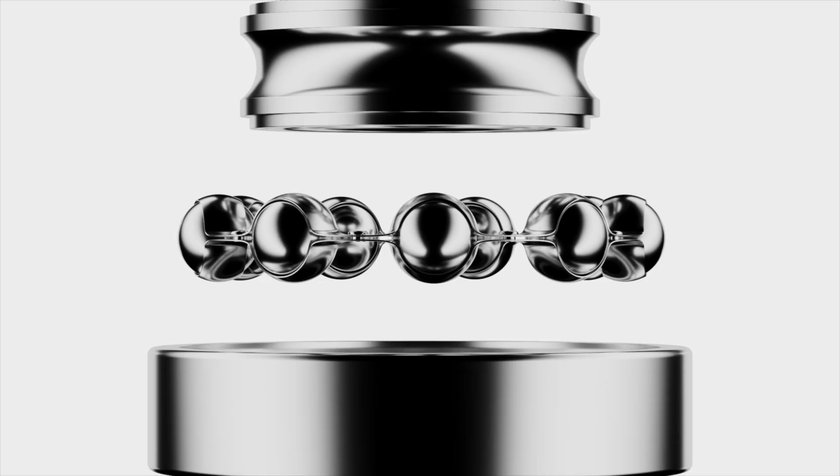Throughout my time at SKF, I've always been inspired by one question: how do we turn great engineering into real benefits? I'm talking about developments that truly help our customers and have a positive impact on the world. For example, innovations that increase reliability and efficiency, or help reduce carbon footprint, or transform your maintenance strategies, minimizing unexpected failures that deeply affect customers' operations.

Last year, we focused on innovation with a purpose. Your feedback was clear: you wanted deeper discussions, clearer use cases, and more real value. And this year, we're planning to do all of that and go even further.

You will go from insight to impact. That means taking what we know from machines, computer simulations, and our engineers' experience, and turning it into value. Think cleaner energy, more uptime, less waste, and much better decisions. In short, results that matter for your business.

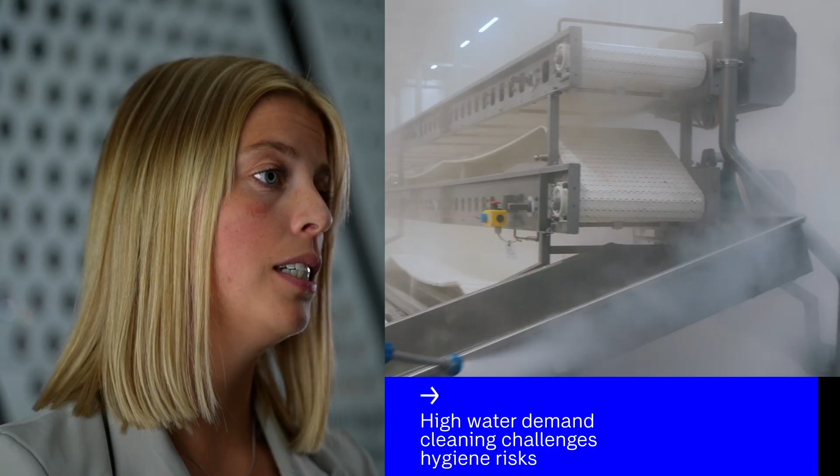Water consumption, cleaning inefficiencies, and food safety risks are often tied to equipment design. And as efficiency targets rise and regulations around hygiene and sustainability become stricter, producers must find ways to clean more effectively, to protect food safety, and to cut down on waste, all without adding complexity.

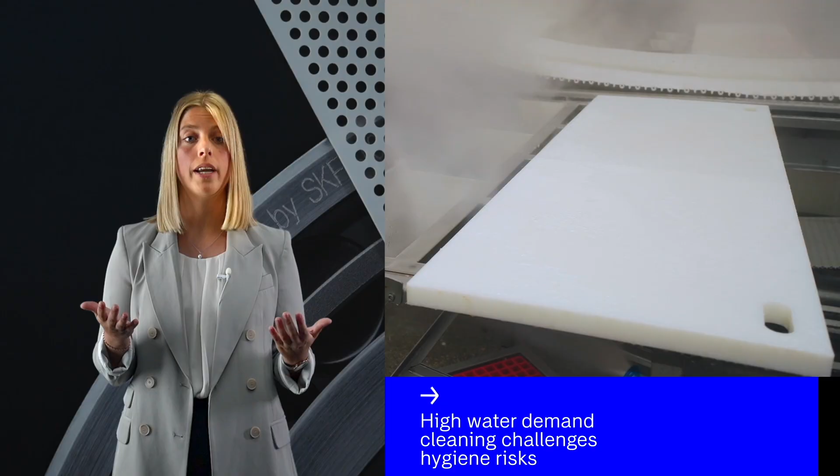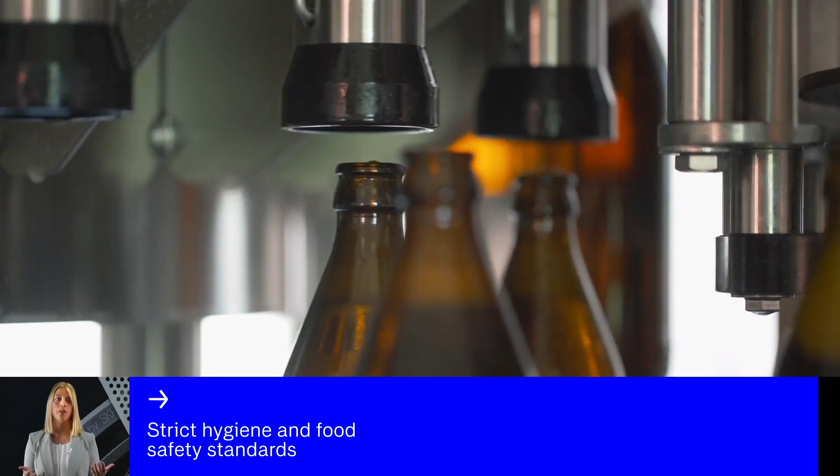Let's take breweries as an example. They rely on systems like clean-in-place, bottle washers, pasteurizers, filling and capping machines, conveyors, and other automated equipment to keep their production running. These systems also need to meet strict hygiene standards and comply with food safety regulations. And that all comes with a cost in water, energy, labor, and time.

Cleaning alone can consume thousands of liters of hot water every day. To put that into perspective, for every 0.5 liter bottle of beer produced, up to 0.75 liters of water may be needed just to clean the line.

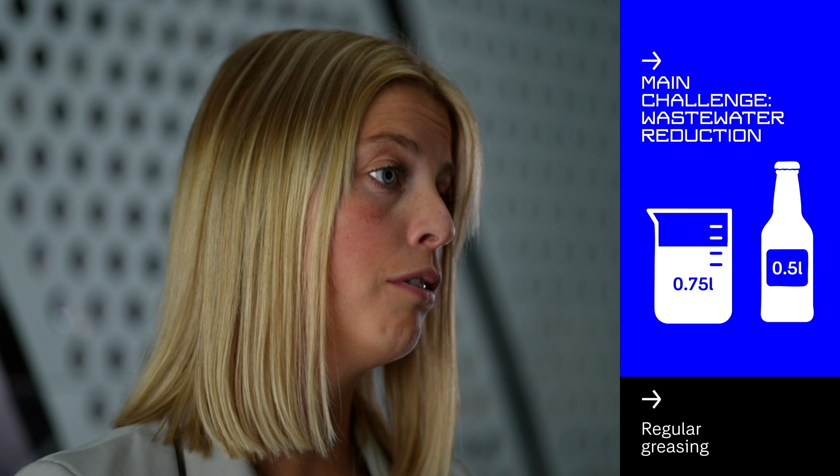Bearing units on the line typically require regular greasing, but during maintenance, production, and cleaning, that grease can leak out. That means more water to remove the residue, more maintenance to reapply the grease, and a higher risk of contamination if any of it reaches the equipment, the product, or the final packaging.

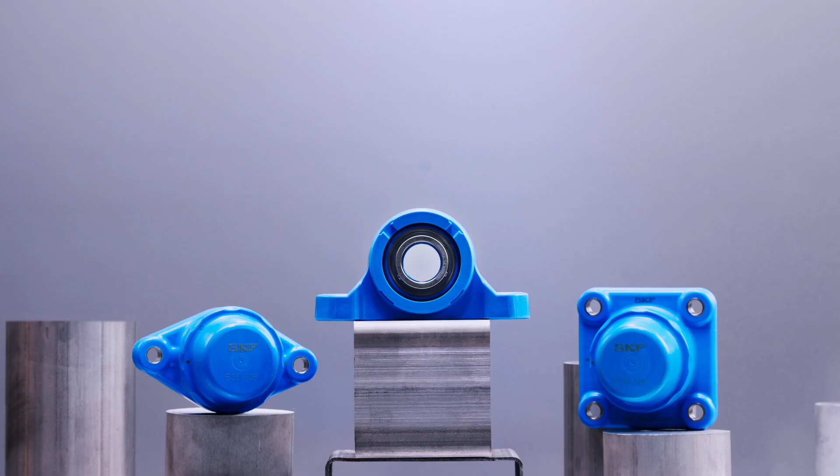It's that kind of environment that we had in mind when developing the SKF food line ball bearing units. They are designed for zones where contamination risk is high, cleaning is intensive and frequent, and where downtime is measured in lost production and financial consequences.

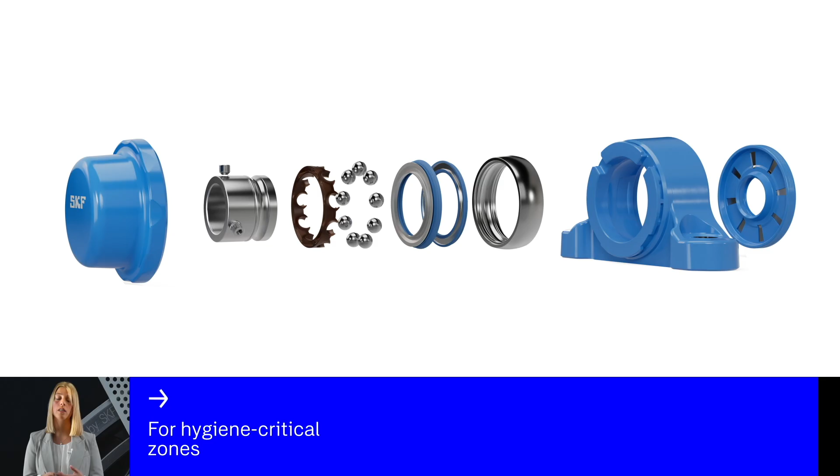SKF food line ball bearing units are used to enable reliable rotation in the food and beverage production equipment. We've mentioned breweries, but these units are used in the production of all sorts of alcoholic and non-alcoholic beverages, as well as dairy products, meat and poultry, fruits, vegetables, and many other types of food.

The hygienic geometry of the housing helps avoid dirt traps where bacteria might grow. The smooth surface enables effective drainage and easy cleaning. Seals are positioned to block contamination from critical areas and keep the bearing grease inside. End caps feature a patented locking system that keeps them securely in place during high-pressure washdowns.

Because both the seals and the housings are blue, any loose parts can be quickly spotted and removed before they become a safety risk. Just as important, the SKF food line range complies with key global standards, including FDA and EC regulations. The bearing is fully sealed inside the unit and greased for life with a food-safe lubricant. Sealed bearings require no relubrication or maintenance, and therefore reduce the consumption of grease and grease absorbents, as well as the risk of grease reaching the final product.

It's a cleaner way to operate with fewer maintenance tasks and less environmental impact.

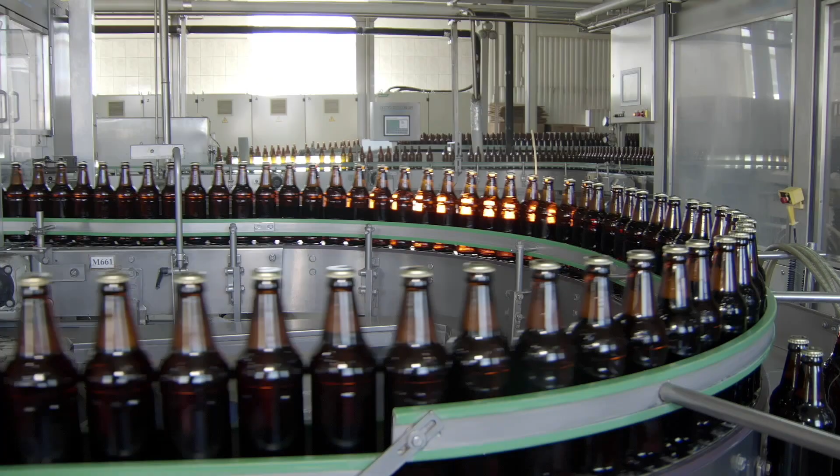For breweries that have switched to SKF food line ball bearing units, the benefits are clear. Cleaning has become more efficient, with up to 33% less hot water needed to clean the units compared to setups that require cleaning excess grease and use non-hygienic designs.

And because the bearings are fully sealed and greased for life, there's also less maintenance involved. Fewer tasks, less downtime, and more focus on production. It's a small upgrade with a measurable impact on sustainability, cleaning performance, and day-to-day operations.

So we've talked about breweries, but what about your own facilities? Ever wondered how much water, energy, or CO2 you could save by just changing the bearing units you use every day? To help answer that, SKF developed an environmental cost calculator.

It's a practical, data-driven tool that shows the real impact of switching to SKF food line ball bearing units. It uses your own plant conditions, cleaning frequency, water temperature, maintenance routines, to estimate your savings in water, energy, waste, and CO2 emissions. It's a simple way to turn small component changes into real, measurable sustainability gains.

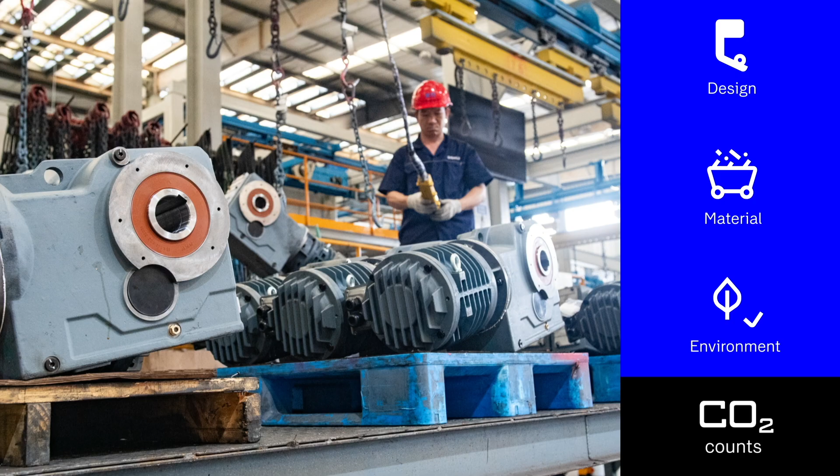When developing a high-performance seal, every decision counts: the design, the material, the environment it's exposed to. And today, every fraction of CO2 counts as well. Seals can generate up to 60% of the frictional torque in a bearing system and strongly contribute to the carbon footprint our customers must report and reduce to reach their net zero targets. After all, less friction means more progress. At the same time, seals are critical for system reliability, with around 20% of reported premature bearing failures caused by sealing issues. That's why sealing performance can't be an afterthought. It must be considered right from the start.

Let's see how that plays out in a tough, real-world example.

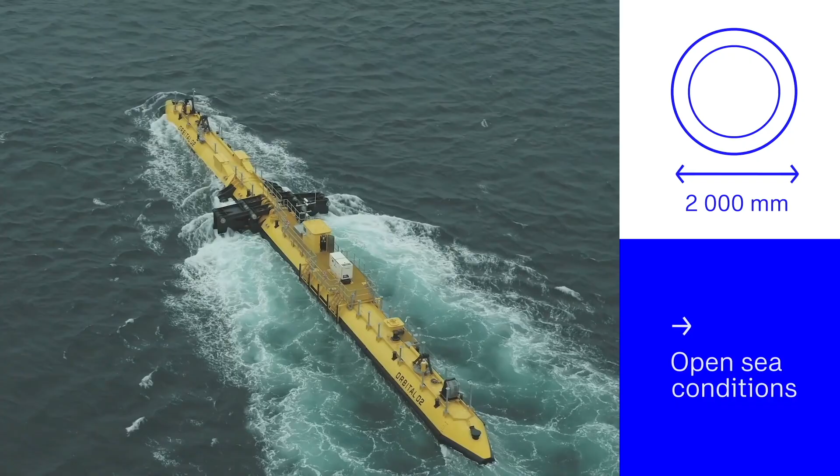Think of an ocean turbine with seals 2 meters wide, operating several miles offshore and up to 30 meters below the surface. Constant pressure, corrosive seawater, thermal gradients, all challenging the seal at once. In conditions like this, standard testing and trial and error are no options. We must consider the impact of many different parameters early in the design phase. So how do you develop, assess, and validate a sealing solution in a case like this?

Imagine being able to test the effect of each parameter and predict how years of operation would influence the seal's service life, all in one instance. That's what our digital twin technology makes possible. It virtually mirrors the real seal and shows how it operates inside the actual machine.

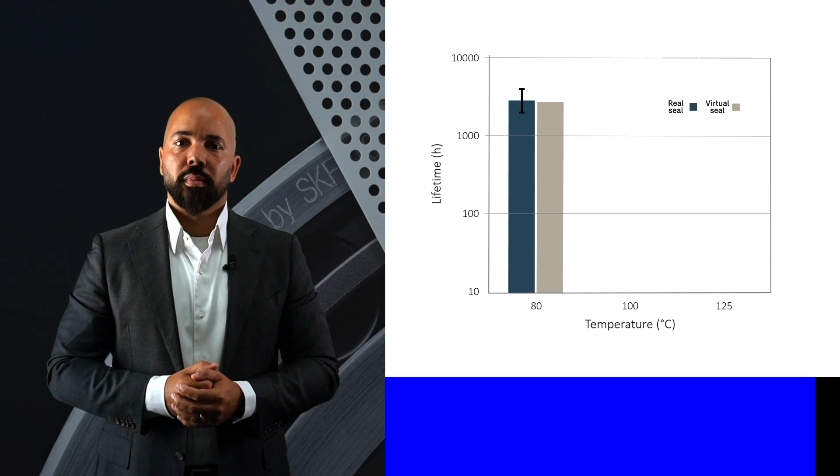Engineers can tweak the design virtually and instantly evaluate how the seal performs under dynamic conditions across combined parameters, from leakage risk to CO2 footprint and expected service life. And the virtual results reliably match the performance in the real application. It's like stepping inside the seal for virtual reality, watching it work and knowing exactly what needs to change to meet customer requirements, all before a single gram of sealing material is even produced.

In standard practice, testing just one parameter, like how a seal works with a certain lubricant at a given speed, takes at least 3 samples to get reliable results. Add up the cost, and you're quickly talking tens of thousands of euros per test. With 3 lubricants, that's 9 seals, all of which need to be discarded, adding to the overall environmental impact. And that's not even counting the energy to run, heat, or cool the testing machine, or the effort to produce and ship the samples.

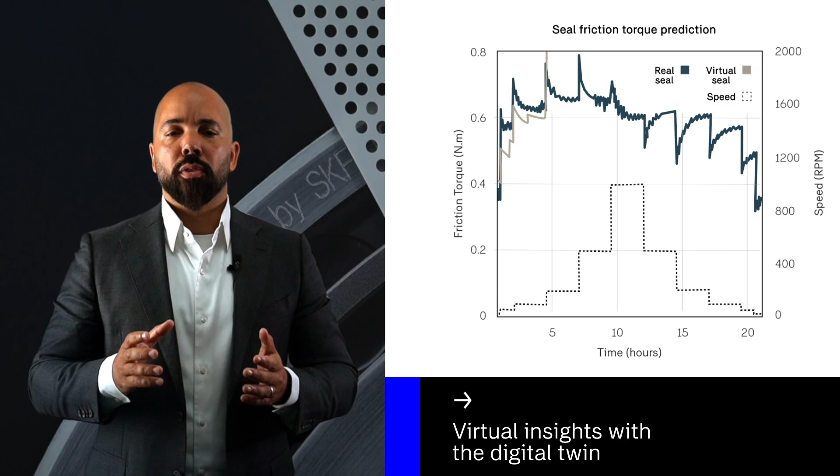That's material, energy, and CO2 spent just to find out what doesn't work. Not to mention time and effort. With the digital twin, we can explore the same variations virtually, reducing the need for physical testing without replacing it, acting faster and smarter to help applications run longer, cleaner, and safer.

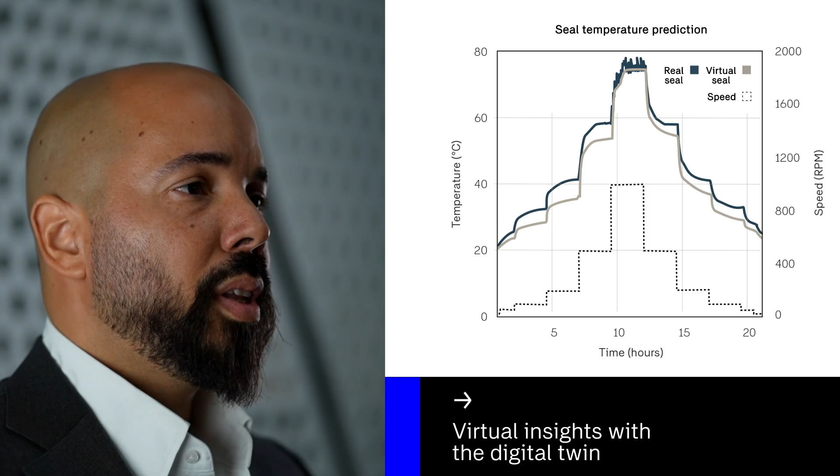But it's not just about the development process. Once the real seal is in operation, we start collecting live data, from temperature and load shift, to shaft speed, leakage risk, and more, all monitored over time with smart sensing. That feedback from field data flows into the digital twin. It helps us spot early warning signs, adjust real performance expectations, and fine-tune maintenance before problems occur.

Think back to our ocean turbine example. Unplanned failures or unnecessary maintenance could mean serious cost of downtime or repair. And if a customer reports an issue, we can recreate the conditions virtually, study the cause, update the design, and often fix it before the problem happens again.

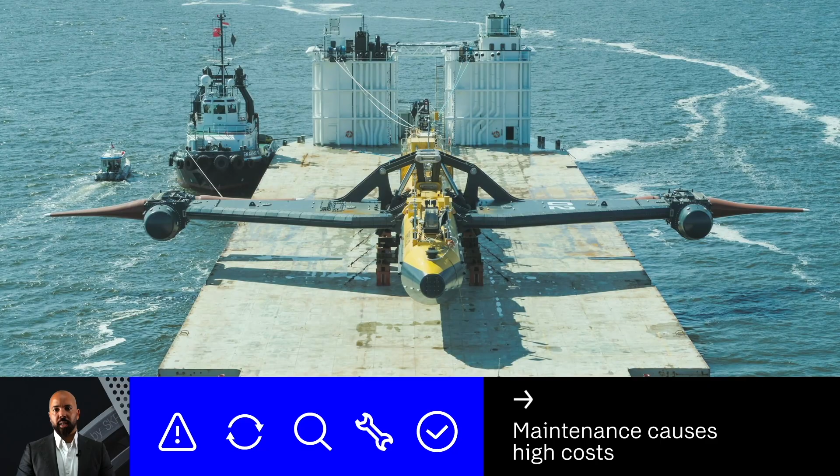It's a continuous loop of learning and improvement, from virtual seal to real seal, through development and production stages, and back again, powered by advanced simulation, smart sensing, and data science. That's what makes our sealing solution truly intelligent.

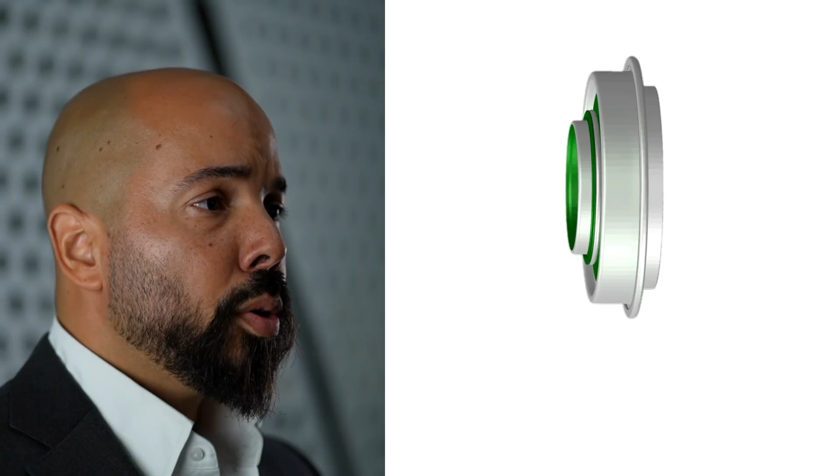That intelligence, the insights from the digital twin, takes us beyond simply delivering a product. It enables us to support our customers with dedicated services, because the digital twin technology gives us an unmatched understanding of how a seal behaves, backed up by over 20 years of research embedded in the platform. And while not every customer has sealing experts on site, the digital twin will help us make that expertise available wherever it's needed. Now let's think beyond the ocean turbine example.

Seals are literally everywhere, in industrial robots, tractor wheels, and wind turbines. By developing digital twin technology, we can make every one of those seals smarter, more efficient, and more sustainable, not by trial and error, but by understanding exactly what they are doing and what they will need to handle next.

And that's the strength of SKF. We never look at a seal in isolation. We understand how it works together with the bearing it protects and the entire system around it. Because when you can visualize the system in this way, you can optimize the performance of every component inside it. That's how we are reimagining rotation for a better tomorrow.

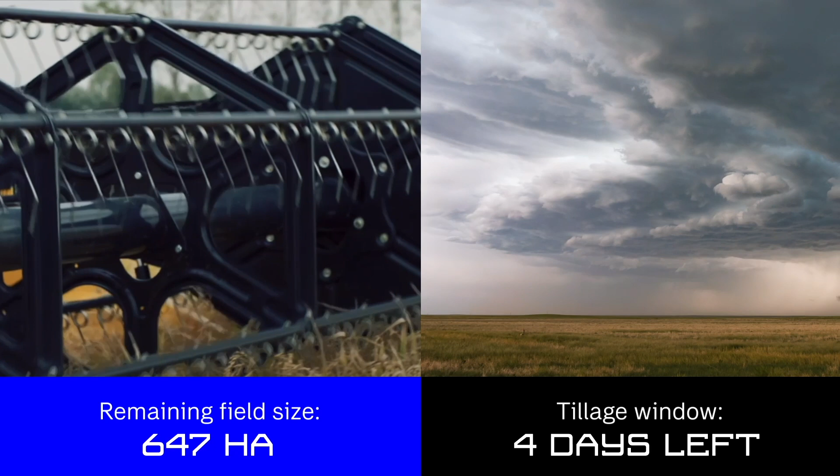Imagine you're a farmer and tillage season has just begun. You have four days of good weather, about 647 hectares of land, and a narrow time frame. Every moment matters, every machine matters, and every component on that machine has to do its job reliably. Let's look at the disc harrow, for example. It's used to manage residue, loosen the soil, and perform shallow tillage. As it's pulled across the field, the rotating discs cut into the soil.

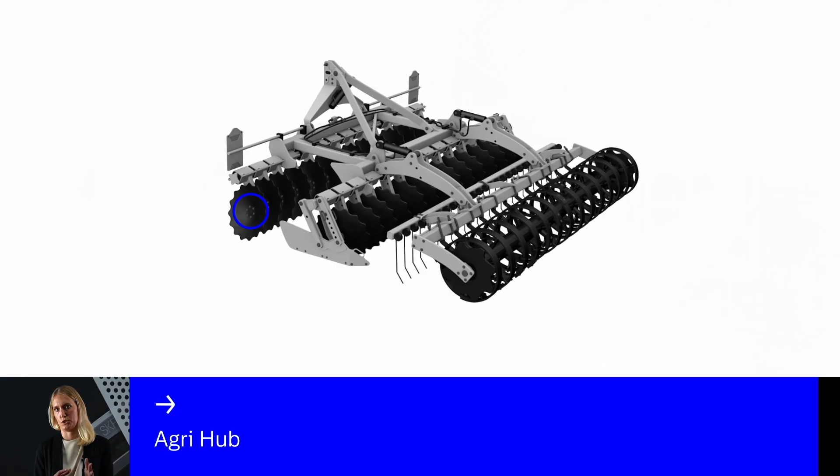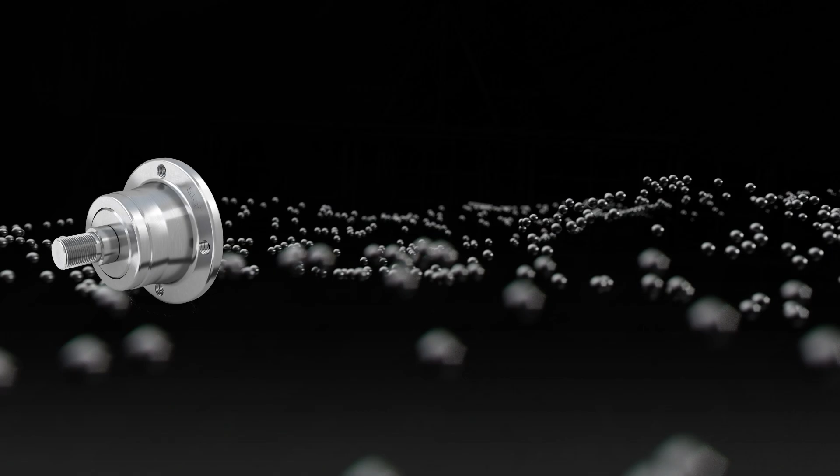At the center of each disc is a compact, sealed unit, a bearing assembly known as a hub. It's absolutely critical for reliable rotation. At SKF, we have spent decades developing and continuously improving these units, catering for various requirements of both equipment manufacturers and farmers. Today, these agri-hubs are mounted on machines around the world, helping to produce all kinds of crops. But some conditions push beyond the limits, especially when abrasive soils, high-speed equipment, and hundreds or even thousands of hectares come together. This is exactly what farmers face today in many parts of the world. The larger the fields they work, the longer the machines must run reliably. And the tougher the soil, the greater the stress placed on components like bearings and seals.

These challenges are real, and they have shaped the next step in our AgriHub evolution. We focused on improving service life and durability so farmers can become more productive. Our most advanced integrated solution yet has been engineered specifically for independent tillage discs to thrive under the harshest operation conditions. This is the AgriHub T400.

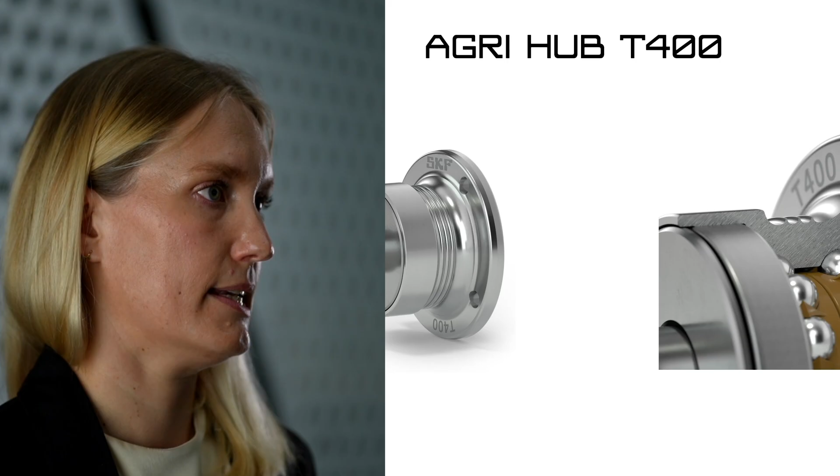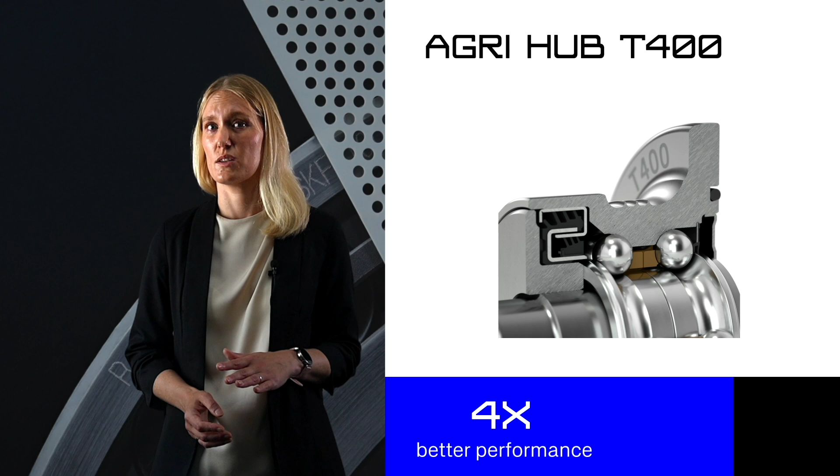At its core, it's our patented super mud block seal, designed and manufactured entirely in-house by SKF. In laboratory mud slurry tests, it delivered 4 times the sealing performance of conventional solutions. 4 times, this means no unexpected downtime, even on large farms. The seal keeps performance high in the toughest conditions.

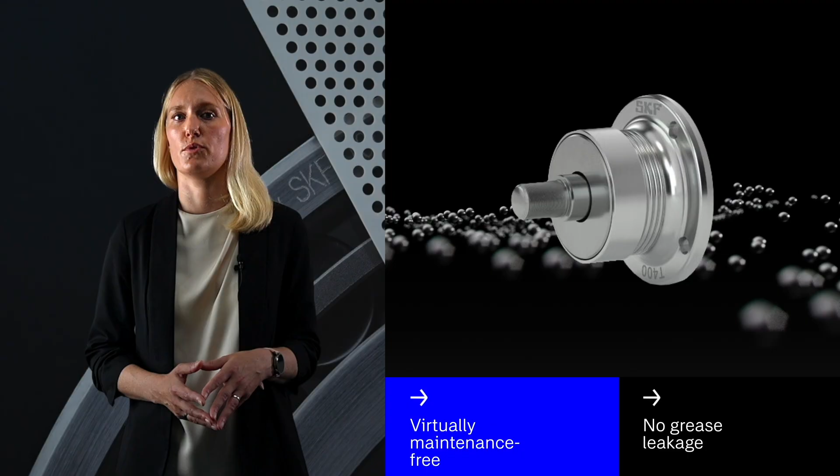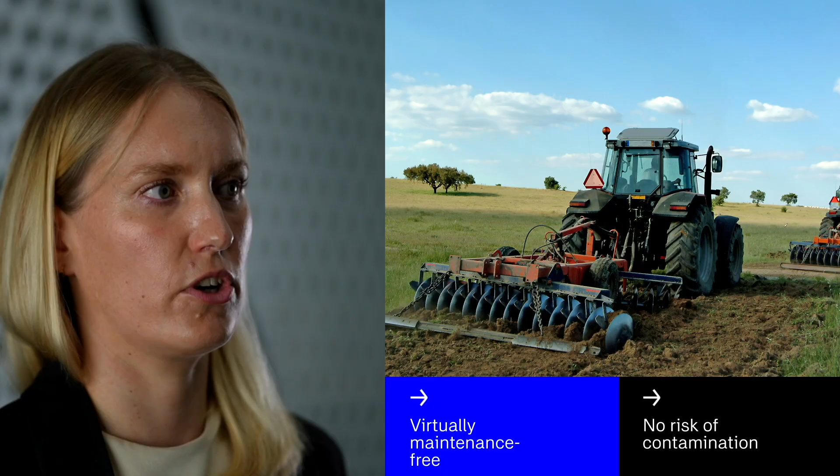With our design, there's no need for regreasing. The T400 is factory filled with the right amount of high-performance grease, and the super mud block keeps it there. And that matters because tillage is one of the most contamination-heavy operations in agriculture, a perfect storm of dust, debris, and soil abrasion. In this environment, the T400's virtually maintenance-free design keeps the machine on the field and eliminates the risk of contamination.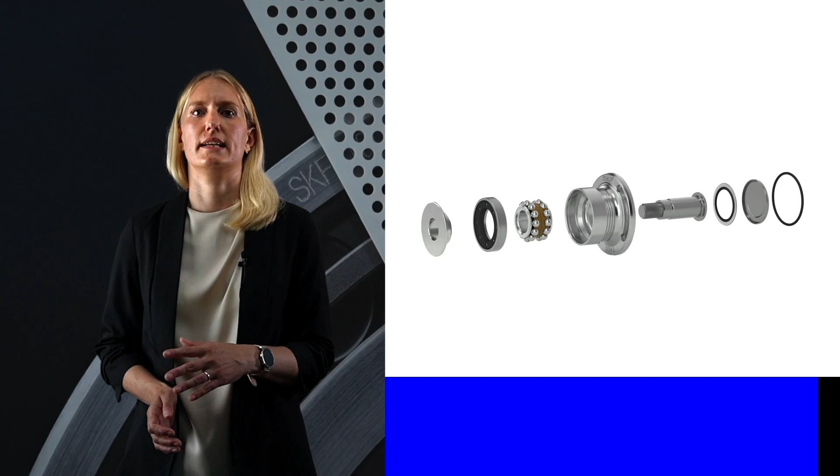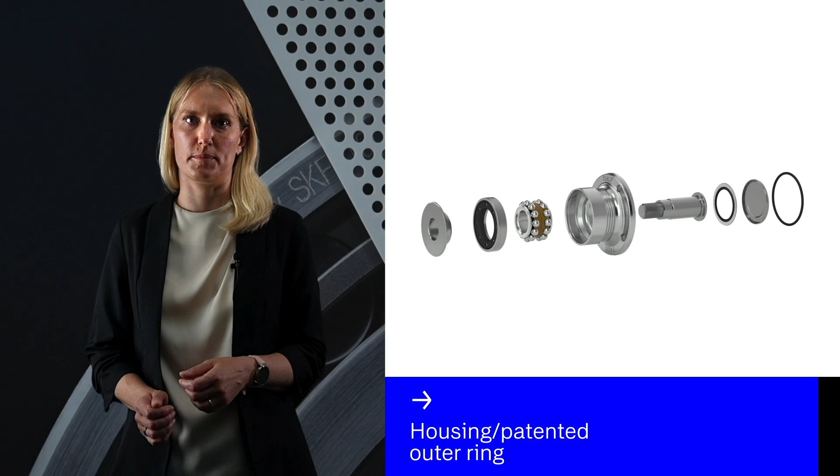For farmers, it means full-season reliability with longer uptime. The performance class of each product is easily identifiable at a glance, and parts can be installed quickly. For the environment, it means cleaner fields, less waste, fewer replacements over time. With greater durability, we lower the life cycle impact of every hub we sell.

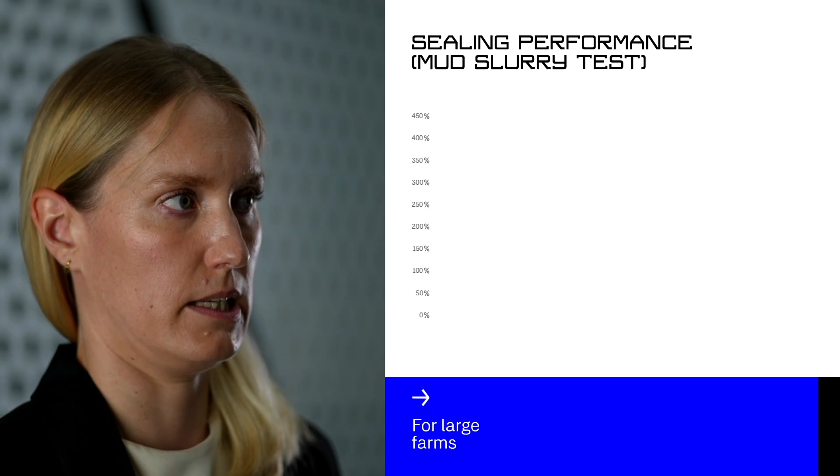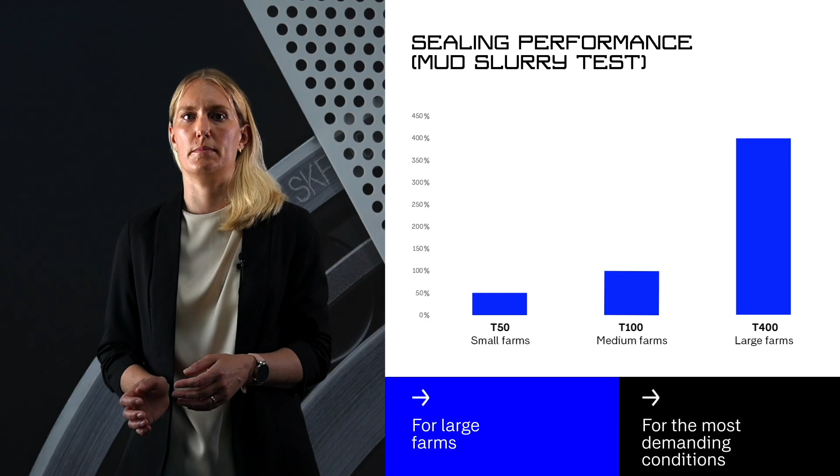The new T400 doesn't replace our AgriHub portfolio, it complements it. Our existing range with the T50 and the T100 provides excellent solutions for moderate and heavy-duty needs. The T400 is our solution for the most demanding conditions. Since every farmer has different durability needs, adaptability is key.

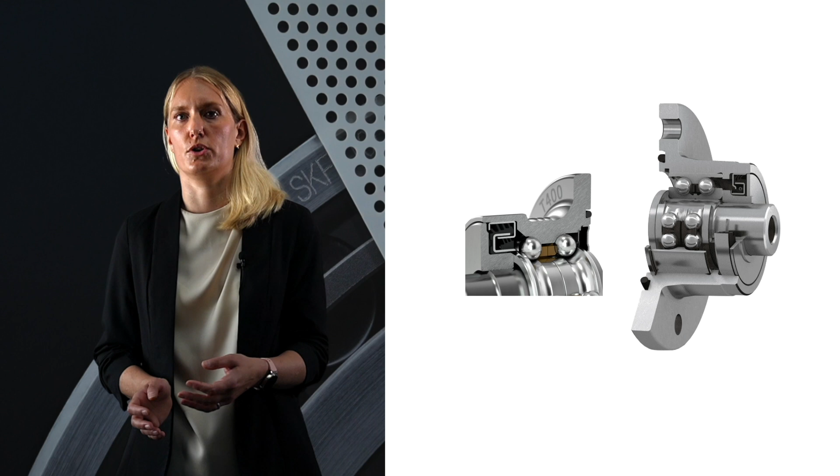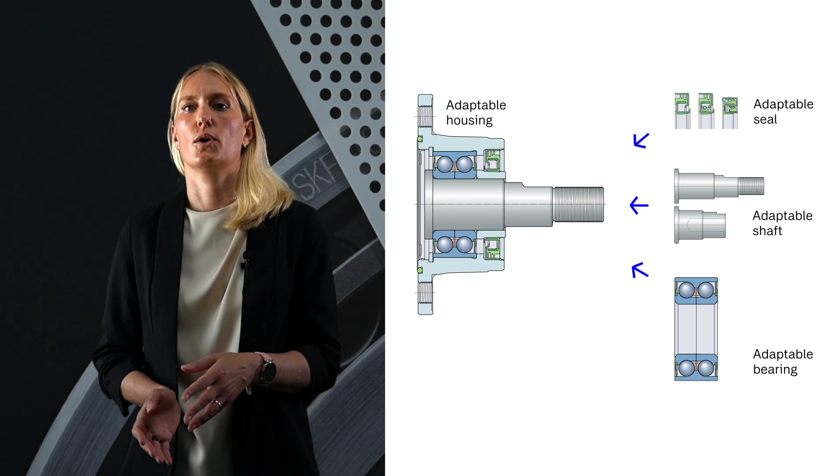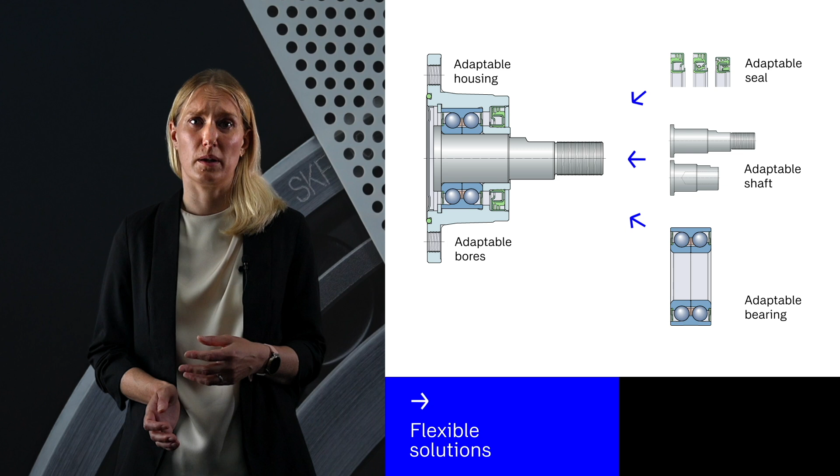That's why SKF AgriHubs are available as both integrated and modular designs. Modularity enables OEMs to flexibly combine different seals, bearings, shafts, and housings to match the machine size, performance class, or even the thread type their customer needs. This flexibility helps OEMs streamline their design and assembly process, especially when building machines for diverse global markets. It is especially easy since all hubs come pre-assembled with performance level clearly marked. Real plug and play, no on-site setup, no need for specialized tools.

At SKF, we believe that reliable food production starts with reliable machines. And during the critical weeks of tillage, when performance is key, there is no room for failure. The T400 is our answer to that challenge. An AgriHub engineered for the scale and pressure of modern agriculture.

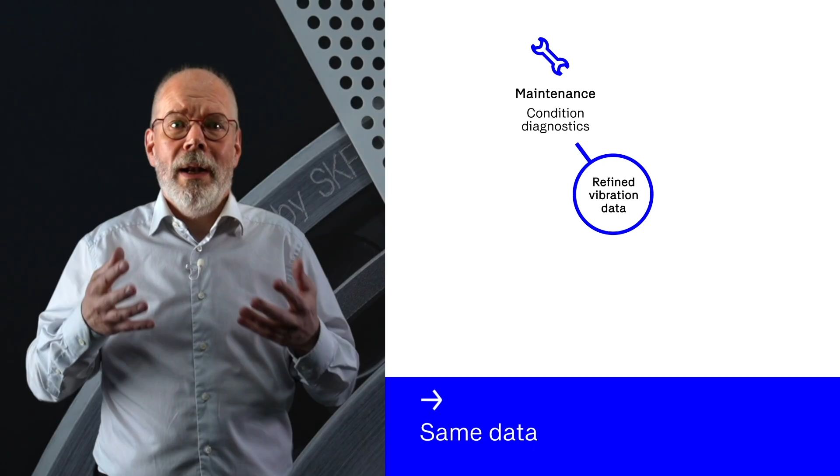Traditionally, vibration data has been used by a small group of specialists, mainly in maintenance. But when the same data is made available in a central system like the AVEVA PI System, it starts to benefit others too. For example, operations teams can monitor equipment health in real time to avoid disruptions. Process engineers can combine it with other parameters to improve efficiency. Data scientists can run predictive models. And sustainability teams can use it to track energy use and reduce waste. The data hasn't changed, but the impact it can have has.

To put this into practice, SKF partnered with Boliden, a leading Swedish mining and metals company with operations across Scandinavia. Boliden extracts and processes essential metals like copper, zinc, gold and silver, all critical for electrification, infrastructure and industry. Their Aitik site in northern Sweden is one of Europe's largest open-pit mines. Together, we ran a pilot using the SKF Observer Pi connector to combine vibration data from critical conveyor systems with process data already available in the AVEVA PI System.

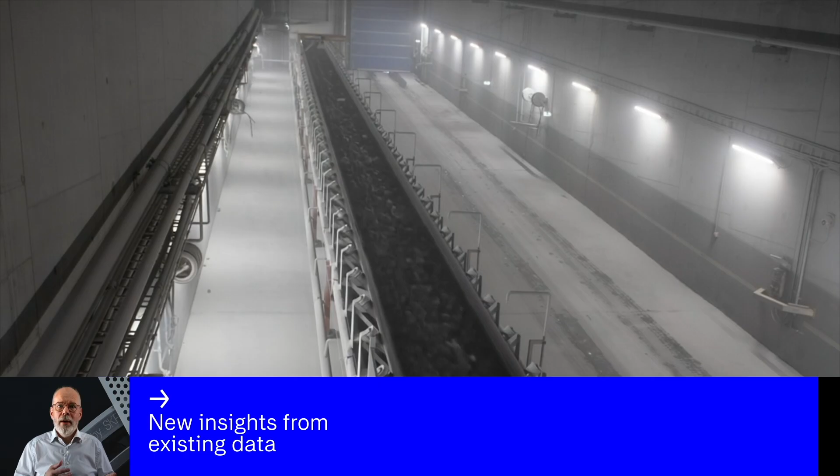So, what happened when we combined vibration and process data at Boliden? We analyzed trends from two critical belt conveyors, specifically looking at vibration, bearing temperature, and process signals like motor load and belt speed. That combination of data revealed patterns and anomalies that wouldn't have been obvious in isolation.

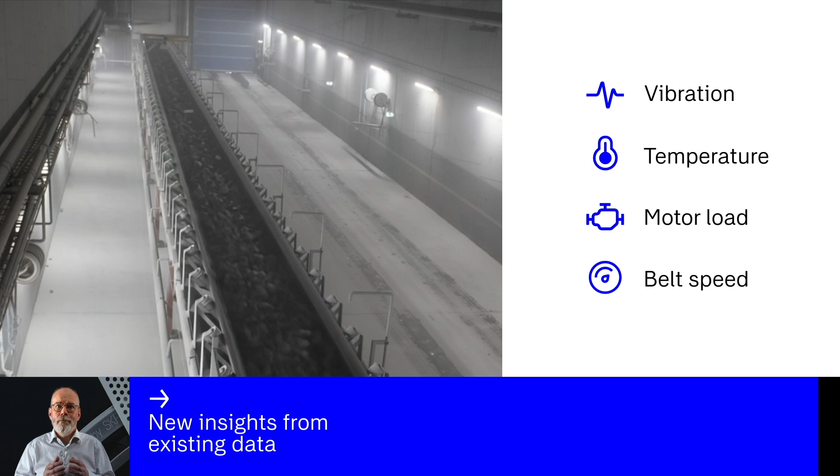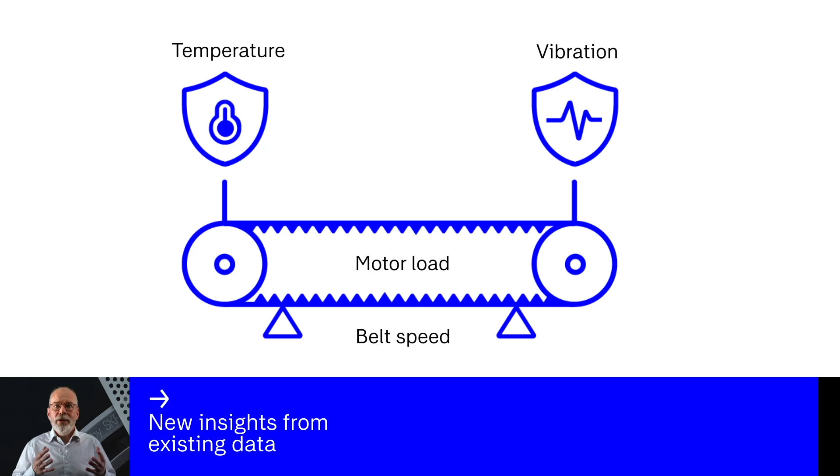We identified temperature sensors related to fire protection that were incorrectly positioned, something that could pose a serious safety risk. We saw that certain issues detected by vibrations could be handled more efficiently when the data is published in a system with a wider user community. In a critical situation, this could help save valuable time.

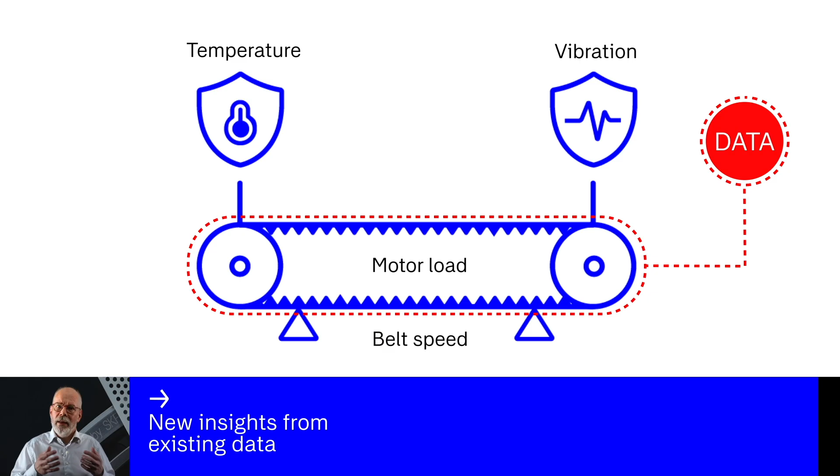We also uncovered issues with lubrication intervals by combining vibration and temperature data. By rethinking these intervals, Boliden can avoid costly and potentially dangerous motor failures. None of these came from adding new hardware. They came from looking differently at the data they already had.

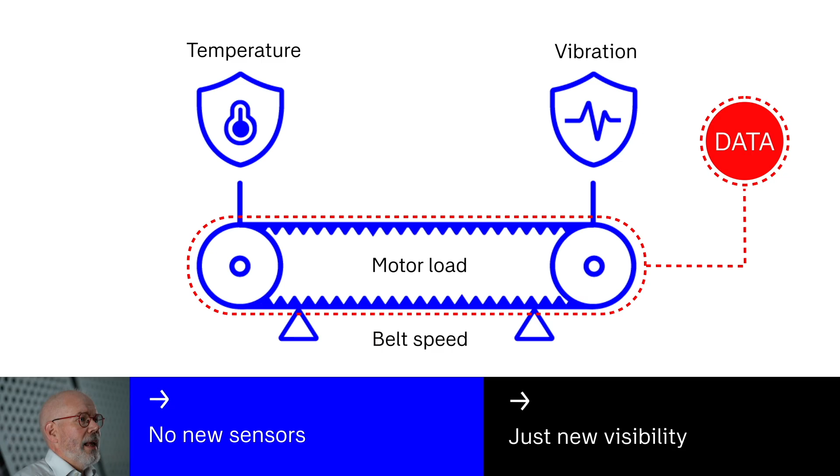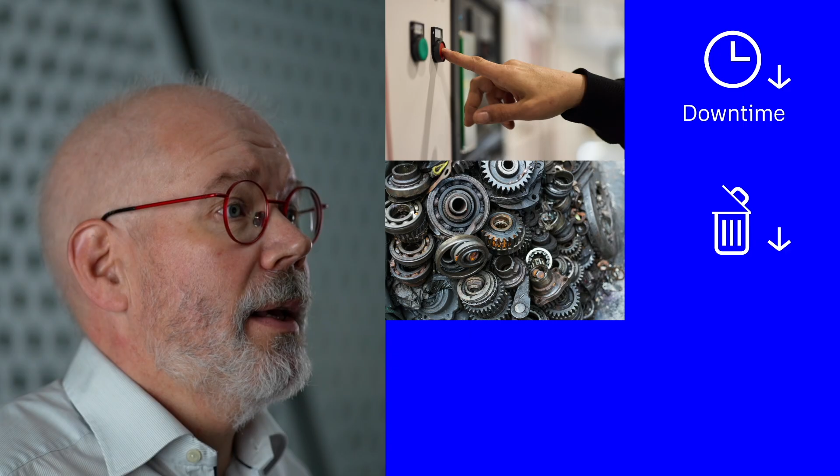Now let's step back. What does this mean for sustainability? First, fewer breakdowns mean less emergency repair work and production interruptions. Second, targeted maintenance extends component life and reduces unnecessary part replacement. And third, by seeing how machines behave in real conditions, we help cut excess energy use and improve process stability. These are quiet gains, made not through big investment, but smarter data use.

So, how does all this work behind the scenes? At the core is the SKF Observer Pi connector, developed by Dianomic using their software FogLamp. FogLamp is based on a secure, open-source framework and acts as a trusted bridge between SKF's condition monitoring system and the customer historian, such as the AVEVA PI System. The connector safely transfers refined vibration data into this environment and works seamlessly across on-premise, cloud, or hybrid setups.

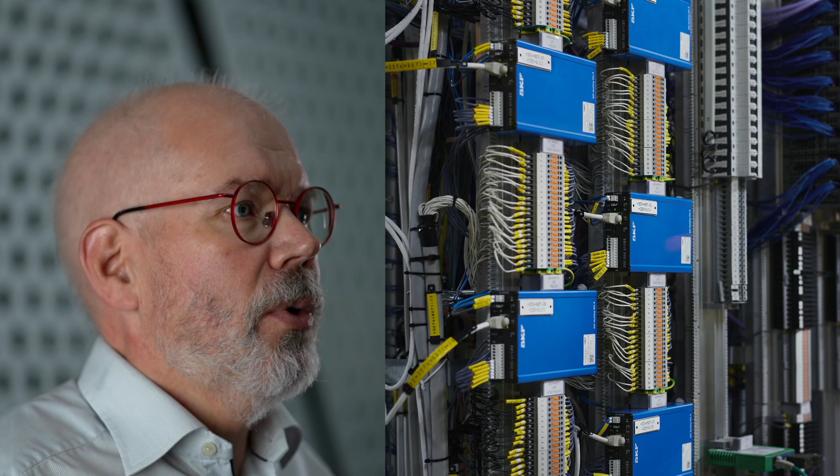In the next step, we use the AVEVA Connect cloud platform to share Boliden operational data, including vibration data, with SKF. What's really important here is that AVEVA Connect puts the customer in control over what is shared and where the data goes.

For many years, condition monitoring was seen as a specialist activity, something handled by a few experts using dedicated tools. But with the SKF Observer PI connector, that mindset is changing. When vibration data becomes part of a shared central platform, it stops being just a maintenance tool and becomes a strategic resource. Now it can support operational planning, efficiency goals, safety decisions, and sustainability targets.

What makes the SKF Observer PI connector so powerful is that it's not limited to one customer, one mine, or one industry. It can work just as well in a pulp and paper mill, a rail depot, a marine engine room, or a wind turbine.

Why? Because many industrial organizations already use historians, and the connector integrates directly into those environments. No need to install a new platform. No need to restructure your data strategy. Just unlock the insights from your existing SKF systems, make them available wherever they're needed.

At SKF, we spent decades helping machines run more reliably. Now we're helping businesses run more intelligently by turning machine health insights into strategic tools. They already have the data. What's new is how accessible, visible and actionable that data can become across teams, sites and systems.

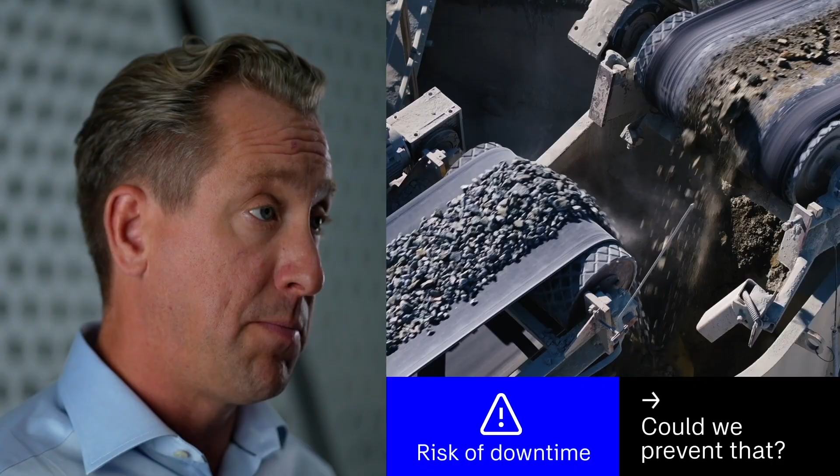Some of the toughest engineering challenges begin far from any lab. They start in the field, where machines never rest, and sometimes in the dust, heat, and relentless pressure of a mining site in the Australian outback. There, conveyor systems stretch for kilometers, carrying thousands of tons of raw material every hour, day and night. When one of these systems stops, it could mean losing millions of dollars. Could we prevent that? A simple question that demanded everything from our engineering team.

I'm Henrik Saleback, and I've spent the past 20 years helping SKF develop roller bearing solutions for some of the world's most demanding applications. Today, I'll show you how we changed the way bulk material is handled worldwide, and it all starts in the mining industry.

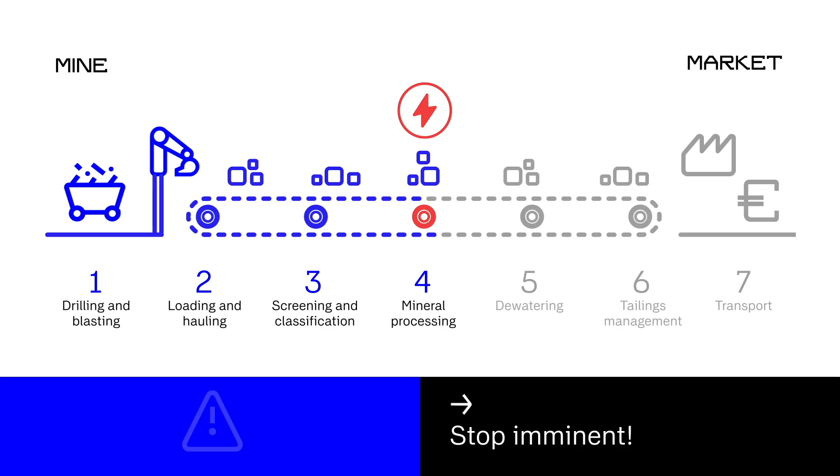In mining, conveyor systems are the lifeline of everything. If they stop, everything downstream stops too: crushing, loading, transport, even production targets. These conveyor pulleys are often placed in remote locations, exposed to demanding environmental conditions and heavy vibration. In many cases, they're meant to run for 11 months straight before a major repair stop is planned, but in reality, they often fail much earlier.

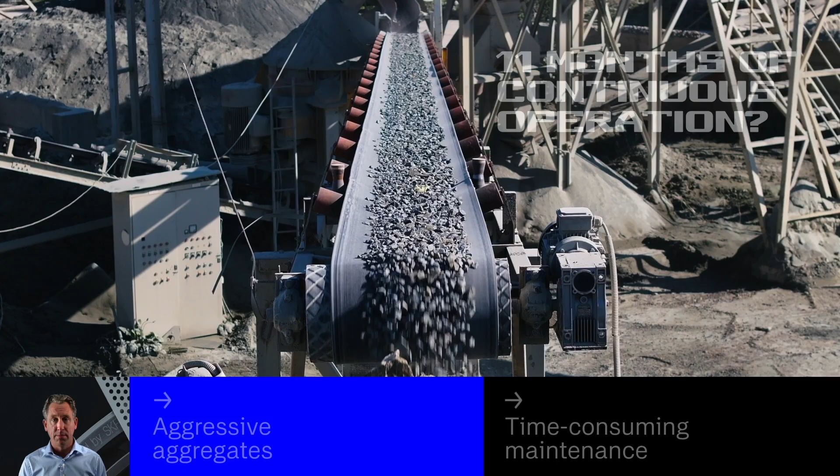Some companies have to stop production every few weeks because extremely aggressive, abrasive aggregates force themselves through conveyor belt seals, bringing pulleys to a sudden halt. Replacing bearings, reinforcing seals, this all costs valuable time. That's the challenge mining companies around the world face today, among them one from Australia. Their pulley systems were operating under extreme load and environmental stress, and traditional housing solutions were simply being pushed beyond their limits. So they turned to us to help them.

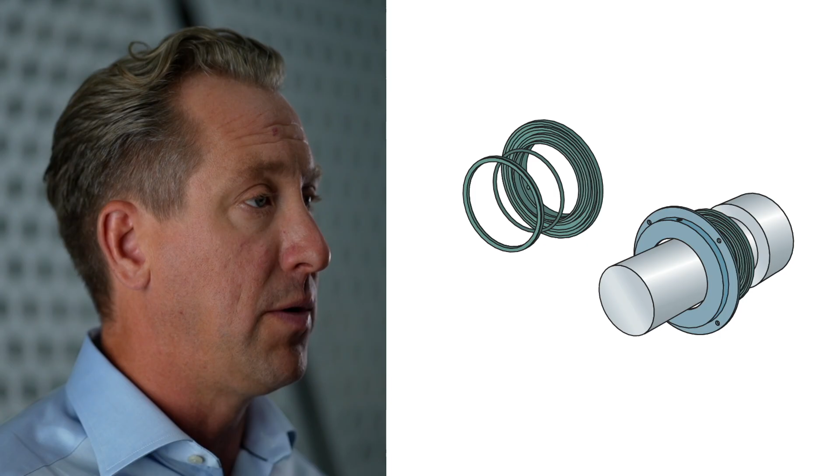We faced an engineering problem. The specialized taconite sealing system used in these environments consists of multiple components, like labyrinth rings, grease chambers, a guide ring, and protective end plates. This setup takes up significant space. To accommodate all these components, OEMs had to extend shaft lengths, particularly on wider pulleys. But longer shafts bend more under load.

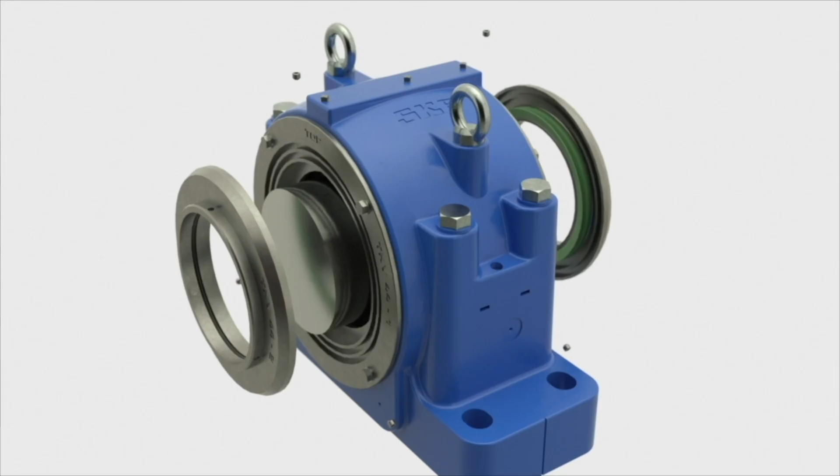That bending causes the belt to drift out of alignment, and that's when you risk a complete system shutdown. The customer faced an impossible choice: a high-performance seal that requires a large housing, or a simpler seal not designed for these harsh environments. But what if we could design a more compact solution that was also easier to install, provided better protection, and lasted longer in real mining conditions? Working with our engineering teams in Australia, we developed an entirely new pulley housing equipped with an improved cutting-edge seal.

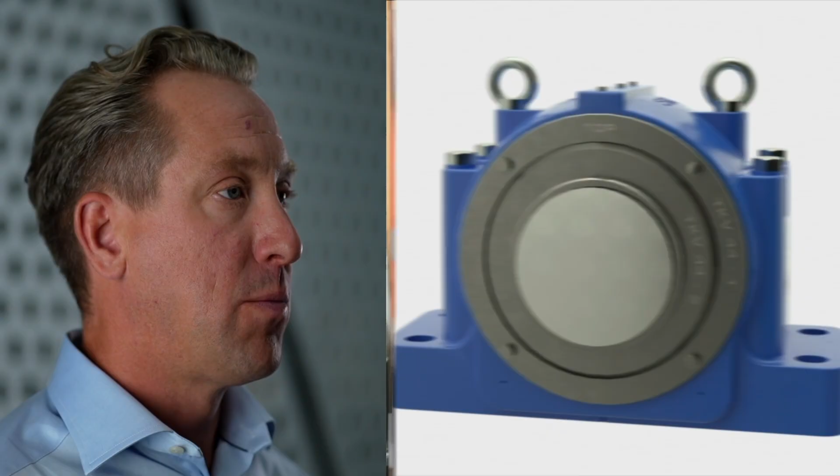Especially designed for this unique application, the entire assembly is compact on the outside and powerful on the inside. This customized conveyor pulley bearing housing started as a solution for one mine, but its concept is already changing the standard for many. The patented seal design has been optimized to handle fine, abrasive dust with minimal grease supply while minimizing the overall width. But what truly makes the difference is that it's nearly impossible to install incorrectly. You position it, you align it, and it locks in place.

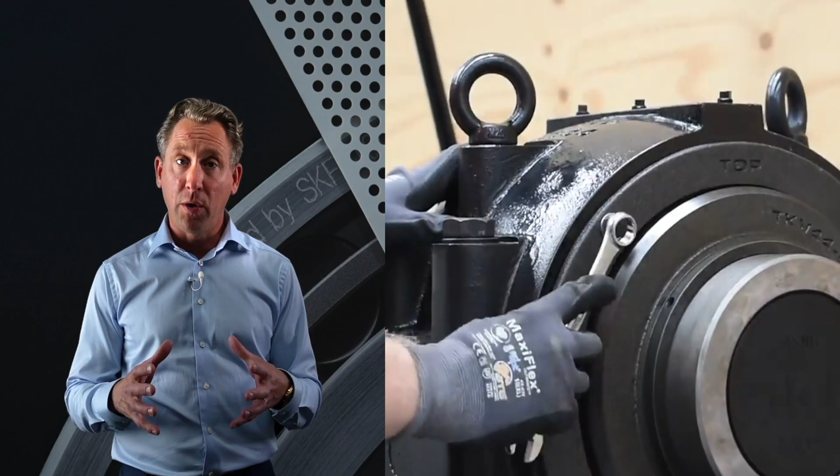The result? Long-term protection without constant regreasing, high performance, less downtime, and less waste. We designed the housing with a bolt-on end cover so inspection and grease sampling can happen without disassembling the pulley. And we made it ready for condition monitoring. Sensors can be added directly, giving operators early warnings before problems occur.

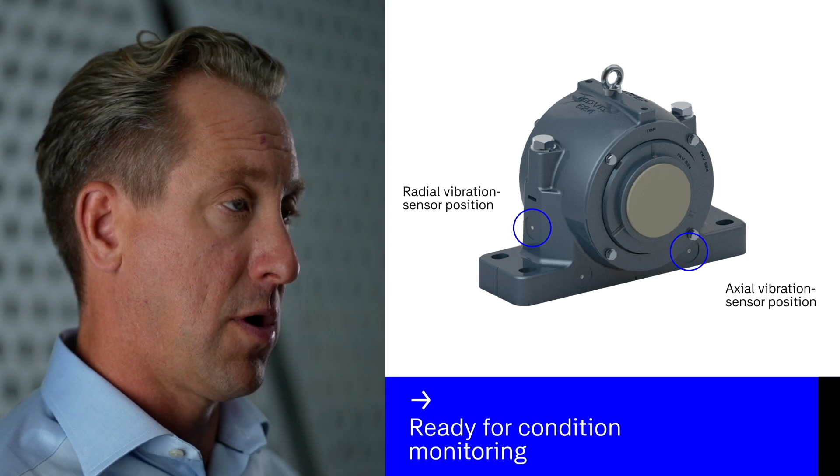Companies around the world can now trust their conveyor pulleys to work reliably throughout the year. Faster installation, longer service intervals with simplified maintenance, and reliability in performance. For OEMs, less required space means greater design versatility. They can develop solutions using less material and without making compromises.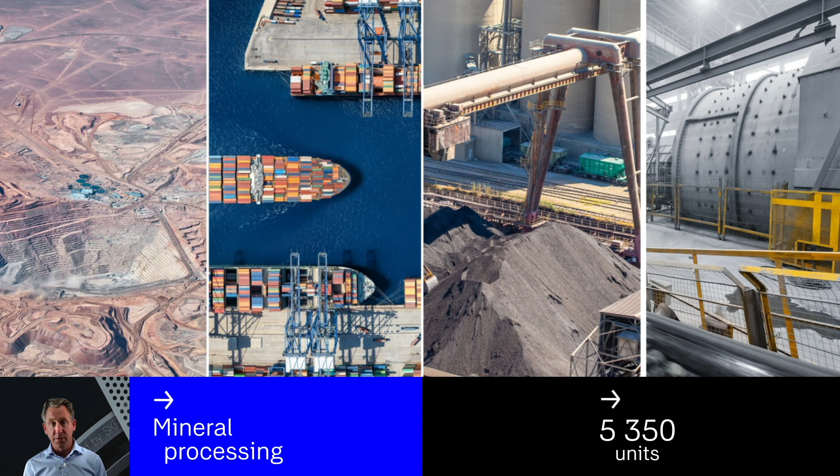This housing solution began as a focused project in the Australian mining sector. Now, it's being adopted globally. Over 5,000 units have already been delivered, not just to mines, but to ports, cement plants, mineral processing facilities, and more. Because wherever bulk material needs to move reliably, the same questions apply: Can we install these plummer block housings easily? Can we trust them long term? And can we even reduce our environmental footprint while doing it? Let's not forget, in these industries, reducing maintenance is about more than costs, it's about impact.

Less contamination and less regreasing mean longer component life, and that means fewer replacements. The SKF conveyor pulley housing for high performance is one example of how engineering and sustainability can move in the same direction. When we started this journey, we were standing in the dust and heat of the Australian outback, watching conveyor systems that couldn't afford to fail.

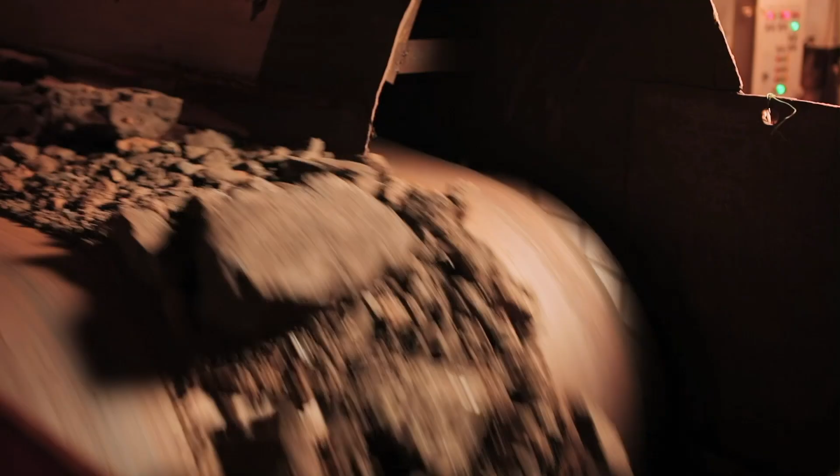This is what makes SKF's approach to innovation special. We start where the rubber meets the road, or in this case, where the bearing meets the pulley, in the harshest conditions on Earth. Our goal is not just to reduce friction, but to actively fight it, to achieve more with less. This only works because we listen to our customers' most pressing challenges, and because we can combine global expertise with local insights. When you consider the scale of need out there, we can make a tremendous impact. And it all started far from any lab, in the field, where machines never rest.

My name is Henrik Salebakk. Thank you for watching.

Well, thanks, Henrik. What a great case. Indeed. Actually, we see similar stories in many other instances, where a solution for one critical application quickly proves to be valuable in other areas. Yeah, and when we tackle tough engineering problems, we do it with scalability in mind. We have to, because reliability, efficiency, and fighting friction are universal needs.

That's true. I think Henrik shows a great example of how we deliver technologies proven in the toughest environments and scale them from field tests to global adoption. And they're scalable and they deliver lasting value as well. That's how we have to use our resources in the correct way. Yeah, and we designed for that.

But the momentum really builds when we co-develop with customers and partners. That's when the magic happens. Yeah, that's kind of the secret sauce of SKF, and that's especially relevant when we interact with our OEMs. They operate in multiple markets, right? They face different conditions, but often the same core needs.

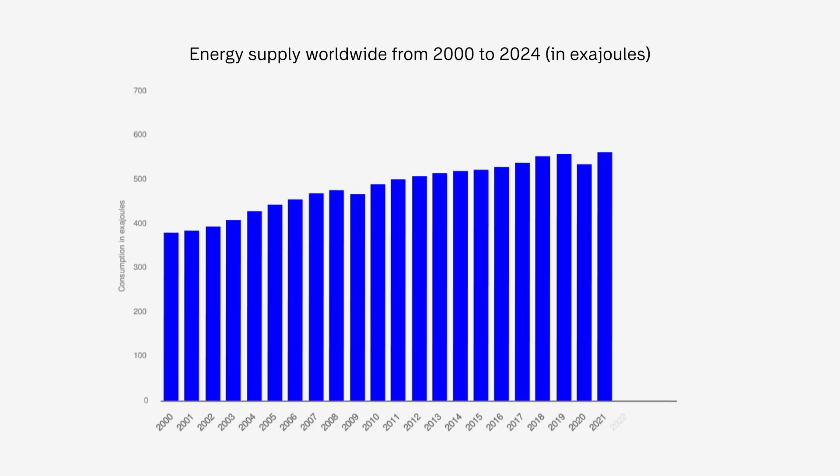The unit is the first outcome of our rail friction program and part of the broader goal: a new low-friction platform for the two most common railway bearing types, tapered bearing units and cylindrical roller units. It's a project that couldn't be more timely. Energy demand keeps rising, and at the same time, the need to cut consumption is more urgent than ever. Across industries, there is growing pressure to operate more sustainably and cut energy waste.

In rail transport, many of the obvious levers have already been pulled: lighter materials, improved aerodynamics, more efficient onboard systems like air conditioning. But there is still untapped potential in components that usually go unnoticed.

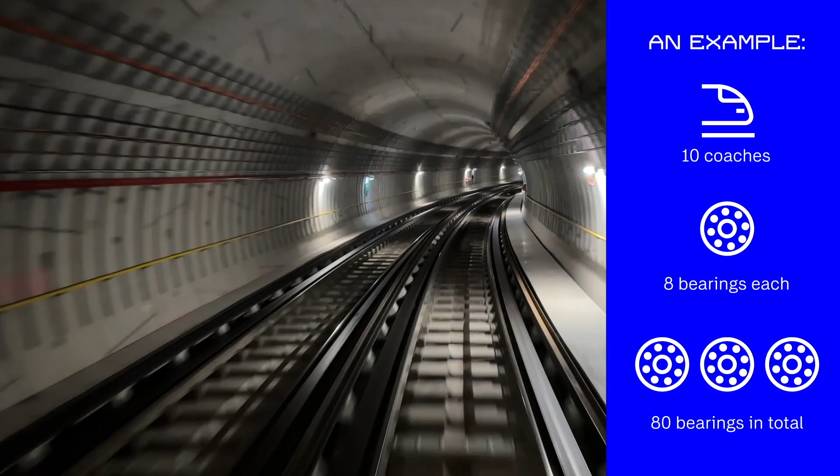Metro trains make this potential very clear. In many cities, they run constantly, day and night, every day of the week. Picture one moving through the underground, 10 coaches long, each riding on 8 bearings. That could be 80 bearings on a single train, all in motion, all generating friction every kilometer it travels.

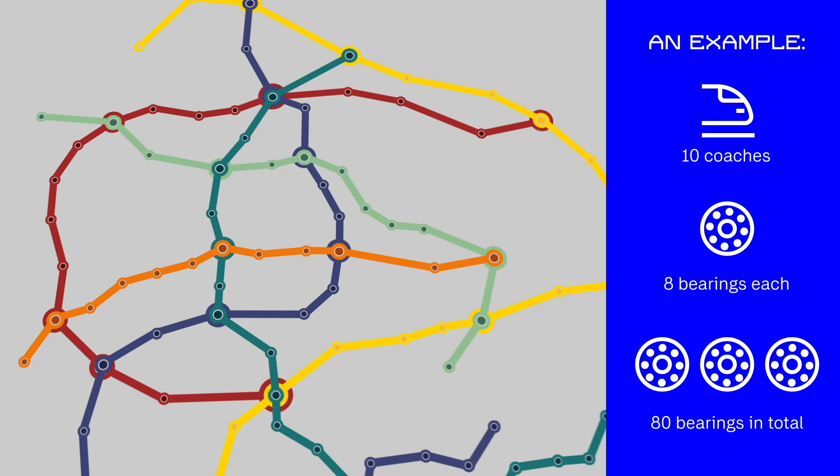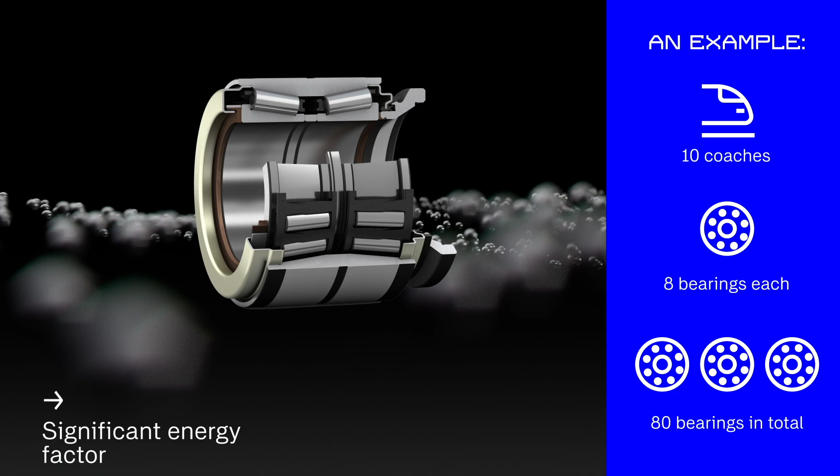Now multiply that across a full fleet, dozens, maybe hundreds of trains running non-stop. Suddenly, what seems like a small component becomes a significant energy factor. In fact, a thesis by the University of Graz showed that in one example of a railway vehicle, wheel set bearings alone accounted for around 7% of total vehicle resistances.

That's when we committed to going further. And when Siemens Mobility came to us with a request from a metro operator to reduce energy consumption, it felt like the perfect starting point. But turning that ambition into action wasn't simple.

For components hidden inside the axle box, there was no standard way to measure friction torque. So we developed our own test method, reliable and built around real operation conditions.

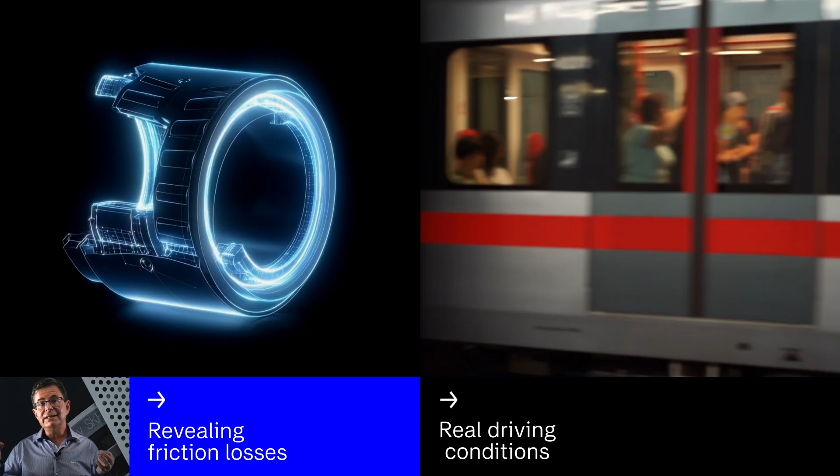In parallel, we created a digital twin model of the bearing's friction behavior, which Siemens Mobility integrated into a full virtual model of the vehicle. This made it possible to simulate energy use under real driving conditions and optimize key components before the first train was even built, a valuable contribution to a much bigger picture.

Building on these insights from tests and simulation, we moved from the virtual world to the real world design and created something completely new. Not by adjusting a few parts, but by rethinking the entire system from the ground up.

We reshaped the rollers to optimize the macrogeometry. Then we refined the microgeometry, including the raceway profile and flange contact, and we designed a new cage. Together, these changes define a new generation of wheelset bearings.

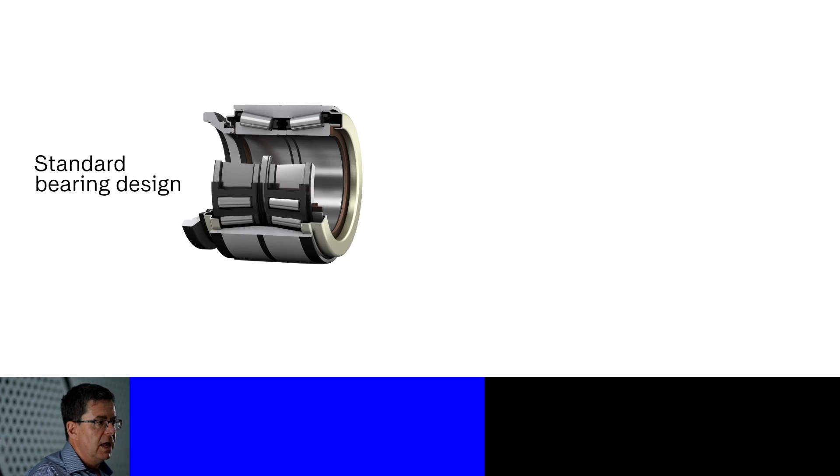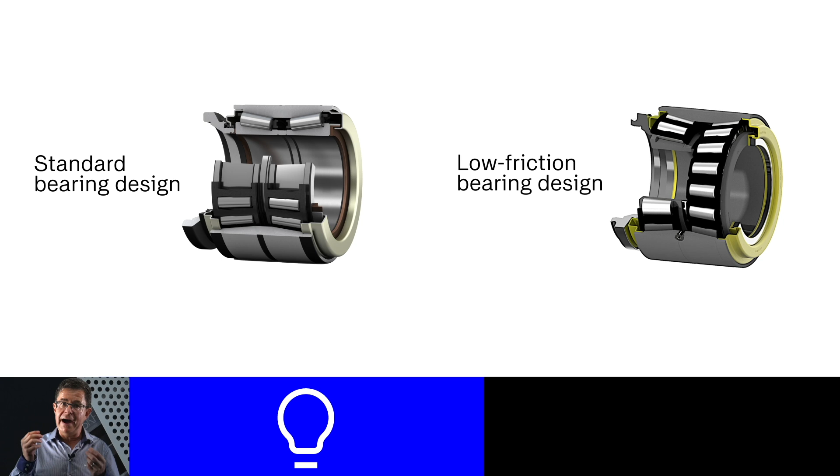And the improvements speak for themselves. By modifying the macrogeometry and making the rollers shorter and thicker, we reduced friction where it matters most, inside the bearing. This also enabled the new cage design, providing better guidance and greater stability for the rolling elements. And a small shift in macrogeometry, seen in roll shape, is even part of a patented SKF design.

Once we had the final bearing design in place, it became part of a bigger picture. If just 25% of metro coaches worldwide use this bearing system, about 40 gigawatt hours of energy could be saved each year, the equivalent of powering around 10,000 homes with electricity for 1 year.

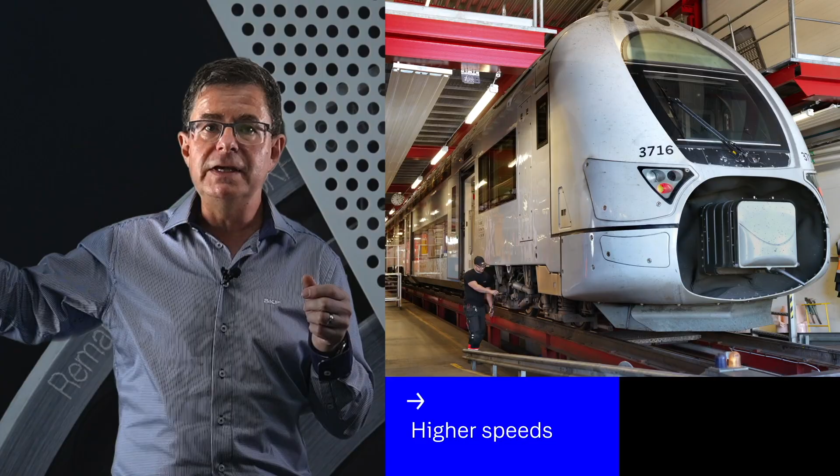With the new low-friction tapered roller bearing design, reducing friction was the key focus. But the single adjustment also brings a range of other benefits our customers often ask for, including higher speeds and longer service intervals. Lower friction means better lubrication conditions and reduced wear, creating the potential for longer maintenance intervals. That translates into more uptime, fewer service windows, and better use of every train in the fleet.

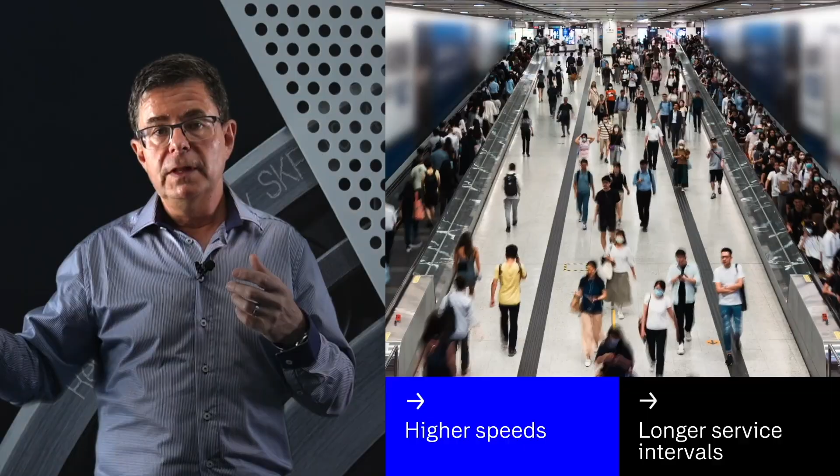And the impact reaches the people behind the system too, like those driving the trains every day, who may benefit from more stable schedules and fewer last-minute changes.

The collaboration with Siemens Mobility marked an important step, one that reflects the needs of transport operators worldwide, and they likely won't be the last. This low-friction bearing concept can be used in every railway vehicle, but the potential for this bearing design, for example, in urban rail is huge.

More and more people are choosing public transport, not just for convenience, but because it's a more sustainable choice. Across the rail sector, the market is seeing steady growth, around 3.5% per year. That development is now opening the door to further applications, with additional sizes and use cases currently being explored. Because wherever reliability, energy efficiency, and smarter maintenance matter, this technology has a place.

But what really made this project work was the team behind it. People from across the value chain, spanning 6 countries, came together to make it happen. Design, testing, digital tools, field experience, every contribution shaped the result. It became more than a technical achievement, and we are proud to say it was recognized with the Purpose Award 2025.